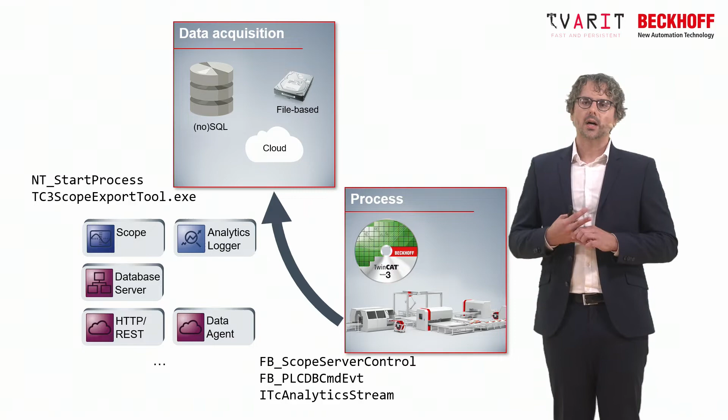So you should be aware of those function blocks down here, like the Scope Server Control for controlling the scope server from the PLC, or the PLC DB commands for controlling the database server, or the interface to the Analytics Stream, which is an interface to the Analytics Logger. Using those tools, you have full control over your data, how you communicate, and also how you store it. And what to do then with the data, that will be explained by Rahul.

Yeah. Perfect. So you have the data with you. What do you do with this data? How easy is it to create an industrial AI model and deploy it in your shop floor, in your machinery, and get benefit out of it? There exist two philosophies, two methodologies we can say.

One, you have the data. Data is your input X, output Y. Machine is going to break down, let's say that is your Y. You have this X and Y. This is the data. Using machine learning, deep learning, you learn what the model is using this X and Y.

Now, the second approach is essentially you have a model beforehand, a model of a specific process. And now what you want to do is simulate machine breakdown, or simulate, let's say, quality defects. This is the second philosophy. The first one is readily used by all AI experts; even the IT engineers, data architects, data scientists are all pretty aware of it. That is philosophy number one. You have data, you have to create a model.

But the question is, is that sufficient? And the answer is no. In case of industrial AI, we need to mix philosophy number one with philosophy number two. In this process, what we are doing is mixing the AI concept with the simulation-related concept. And that's what is being shown here in this particular diagram.

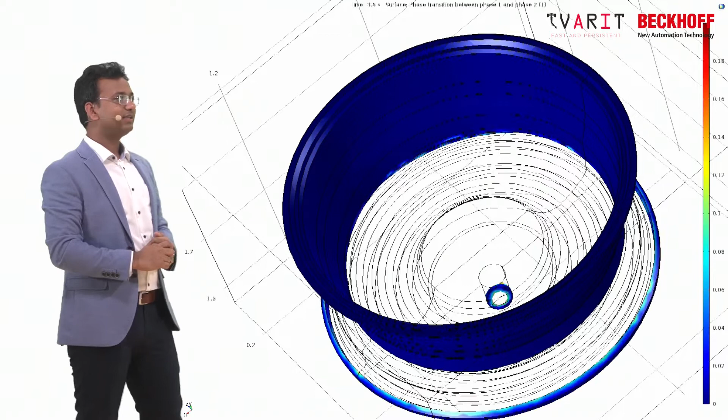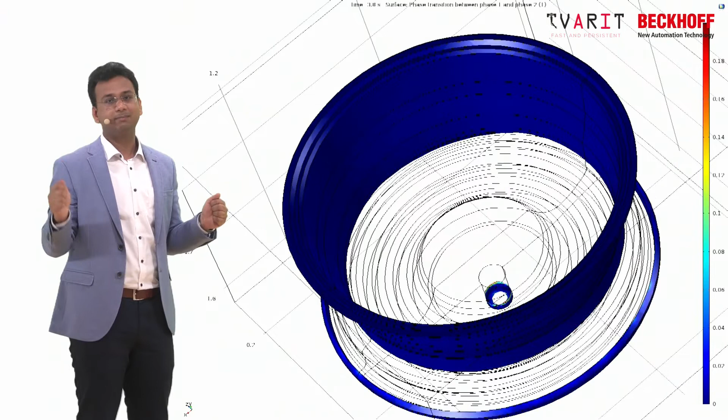Here you can see, apart from the real-time AI methodology, the data-driven methodology, it's also very, very important to do a physical or chemical simulation of your process. From a physics point of view, you try to simulate the breakdown, or you try to simulate the defects, depending upon the use case. Once you have these two, you fuse this knowledge together in order to bring a highly accurate model.

Let us understand very briefly how it looks on the Tvarit industrial AI software. Perfect. So the Tvarit industrial AI software, what exactly is it? I'm sure all of you IT engineers, data architects, data scientists, by the way, I myself have been a data architect earlier and also a data scientist. I have lived the life of a data expert and IT engineer.

I know the pain we have when integration fails, when the integration between script number 1, script 2, script 3 fails, and you start debugging, but you do not know where exactly the problem is. And that has been one of the motivations behind coming up with this industrial AI framework.

In this framework, you can essentially go straight ahead with machine definition in step number 1. In step number 2, you can define all the parameters. And then finally, you can run the industrial AI jobs. These jobs are nothing but AI algorithms. Here, also a very important thing is the machines.

One unique thing about the hybrid model approach is that you can also keep storing these industrial AI models, which are ready-made AI models corresponding to specific types of machines. Let's say the machine is a welding machine, or a sheet metal cutting machine, die casting machine, or hot rolling mill machine. There can be all different types of machines, and all of them can be stored here as an asset repository in our framework.

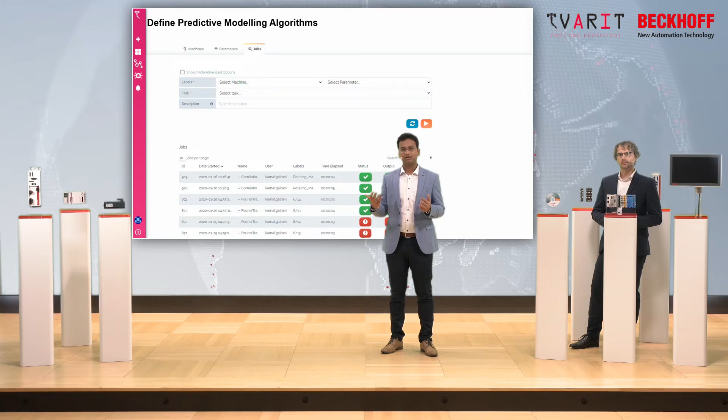Here, if you click on this output, you will be able to see the results directly in the dashboards. These can be directly integrated with Tableau, QlikView, etc. Once the model is done, now let's talk about deployment.

Perfect. So for deployment, I would again like to invite Fabian. Fabian, maybe you can explain a little bit about the ONNX framework. Yeah, thank you, Rahul, for the very nice explanation of the Tvarit Industrial AI software.

I think maybe some of you already know ONNX as a description file. I want to say a few words on the basic ideas of ONNX and why it is used. So ONNX, first of all, is an abbreviation for Open Neural Network Exchange. The basic idea of ONNX was to have a common file format for all the different AI frameworks like PyTorch, TensorFlow, Paddle, MXNet, and so on. There are so many different AI frameworks in the field.

And then all of a sudden there was an idea: we should somehow have a common file format to export a learned neural network from PyTorch, for example, and then import it into TensorFlow. And this is one of the key elements of, for example, transfer learning. So you train something in your framework like PyTorch, you export it as an ONNX file, you publish this ONNX file somewhere, and other users can import it in their beloved framework.

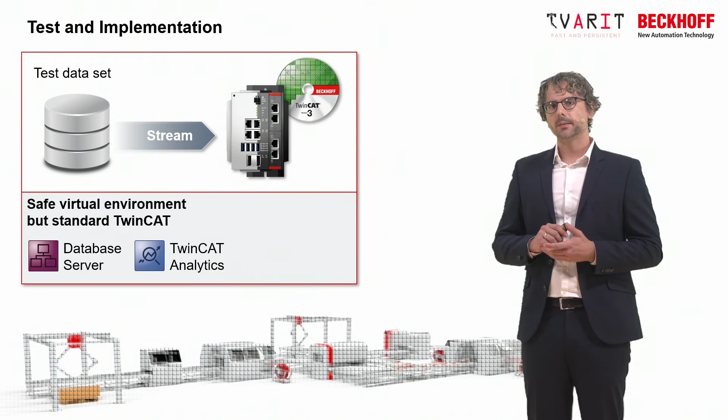So the best way in our thinking is to, first of all, use a test database and stream the data that you want to test into the TwinCAT environment, and then use this in-streamed test data for evaluation of the model that is now implemented in your TwinCAT environment. So you directly have the production code. It's pure TwinCAT PLC code, but you test it with your test data set. And only if this test of your implementation is successful should you go a step forward and implement this directly on the machine.

And this can happen, of course, in different ways. As I think most of you know, we use PC-based control, and PC-based control basically means scalability in performance. So we can start with Intel Atom-based controllers and go up the complete row over the Intel Core i series to the Intel Xeon processors. Because we also build our server cabinets, you can also use hardware accelerators if you like to run the models on these accelerated platforms. What kind of software do we provide for implementing all those?

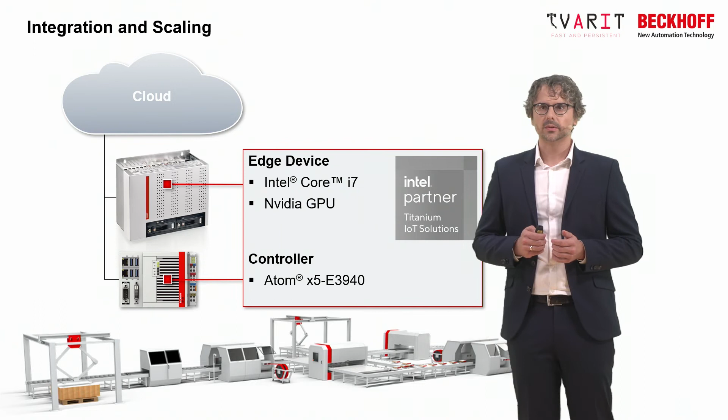On the one hand, we have a PLC-integrated inference engine, which means that it's running in hard real time. We don't need additional hardware for it because it just runs on the standard CPU that you already use for controlling, for the PLC, for your NC task. And for this, we use selected and highly optimized AI models. As of today, we support, for example, multi-layer perceptrons, support vector machines, the random forest algorithm, and k-means, are currently working on PCA, and also upcoming algorithms like CNNs and LSTMs. But those are very selected and highly optimized.

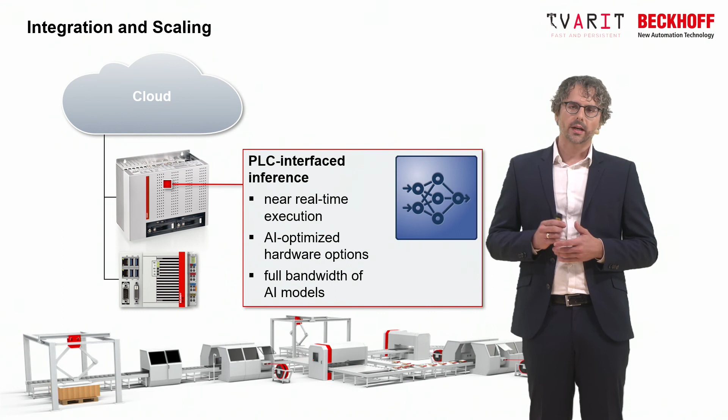On the other hand, we have another inference engine, which is PLC-interfaced. This runs in near real-time execution, not directly in the hard TwinCAT cycle in the real-time tick, but we have access to highly AI-optimized hardware options like big GPUs, big server CPUs, and scale over dozens of CPU cores. You can also use integrated GPUs for execution, and you don't have the selected highly optimized models, but you have the full bandwidth of all AI models available in this inference engine. As depicted here, you could either use an edge device for that and have separate devices, one for control, one for inference. But of course, you can also implement this all on one device.

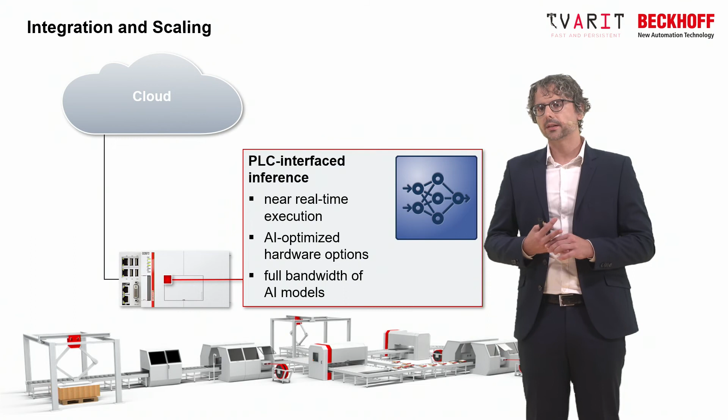So just scale, for example, to a Xeon D-based CX module and have full processing power, so that you have the Xeon D CPU power and also the graphical unit available on this controller for running your AI models very near real time to our hard TwinCAT real-time environment.

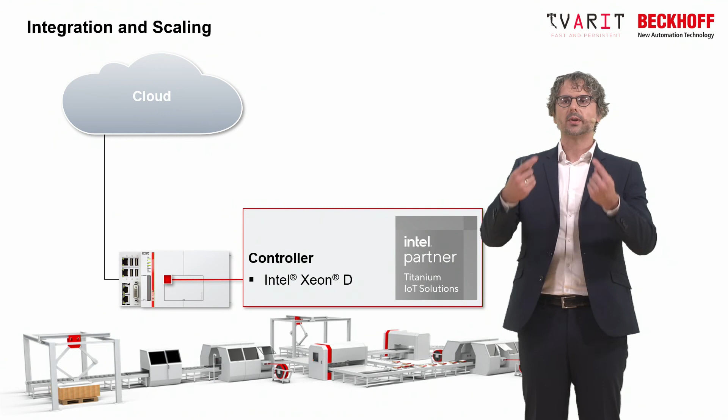If low latency is not an issue and you may only have a unidirectional data transport, so transport is only going to the inference engine but no reaction is required in the machine, cloud deployment is, of course, also an option, and you end up with something like AI as a service. You connect your machine using our TwinCAT IoT or database products to a cloud infrastructure and then run the inference on this infrastructure.

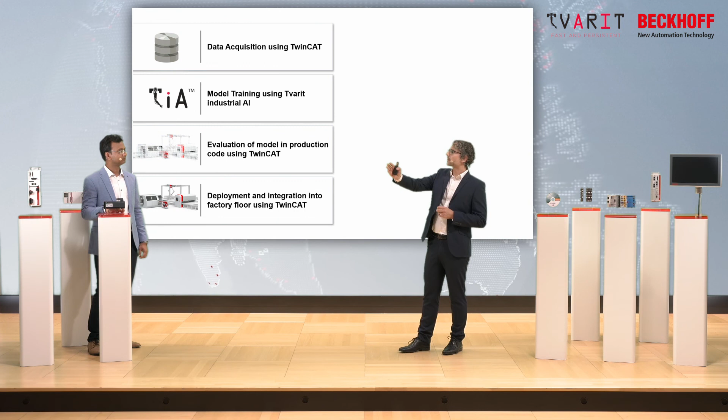Okay, a small recap on this fourth video. First of all, we talked about data acquisition using different kinds of TwinCAT products. We also talked about the possibility of using the PLC function blocks for interacting with the data logger and what the pros of this concept are. We also learned from Rahul about model training using the Tvarit industrial AI software package. We learned about evaluating the model in production code using TwinCAT to stream test data sets into your PLC and test your implemented function, the inference engine in the PLC. And in the end, we also talked about different deployment strategies in the factory using basically TwinCAT product families.